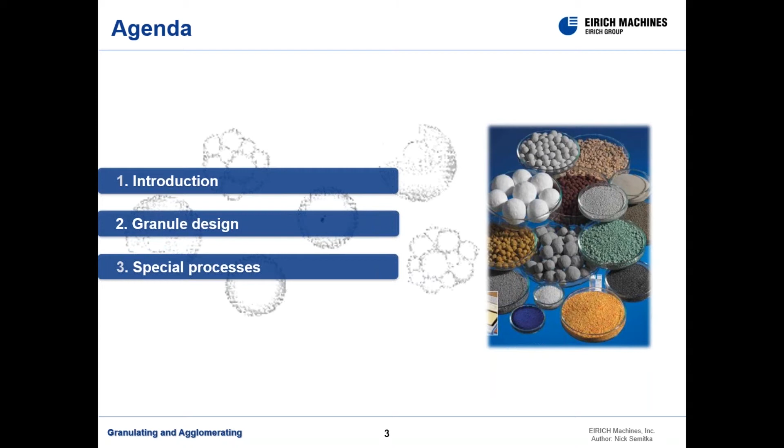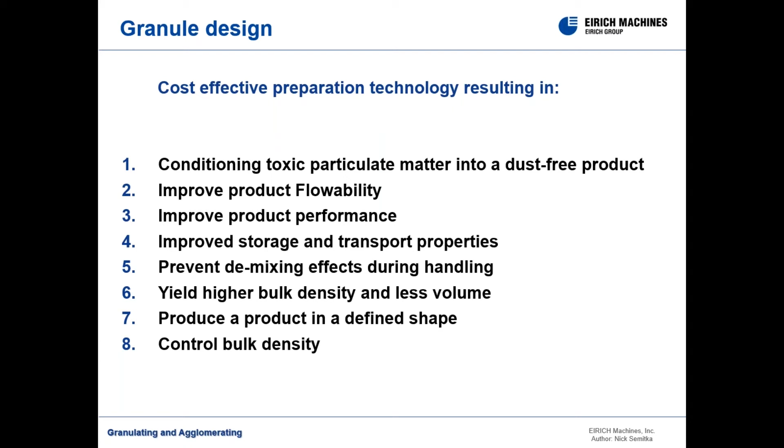Why do we want to granulate and what are the benefits? Some of the benefits: conditioning toxic particulate matter into a dust-free product, improve product flowability, improve product performance, improve storage and transport properties, prevent demixing effects during handling, yield higher bulk densities and less volume, produce a product in a defined shape, and control bulk densities.

You can find agglomerates or granules everywhere, not only in industrial applications but also at home, such as medicine tablets, washing powders, charcoal briquettes, fertilizer, cat litter, etc. All these products are distinctive in their own way, but they all follow the same physical laws of granulation.

Today we'll review formation methods, granule design, and special granulating processes.

Press agglomeration is the process of forming shapes using external forces. Some common processes include briquetting, which is a compaction technique where the feed material is pushed into the nip of two counter-rotating wheels. High pressure is applied and the rotating wheels compress the feed between the pockets to form shapes.

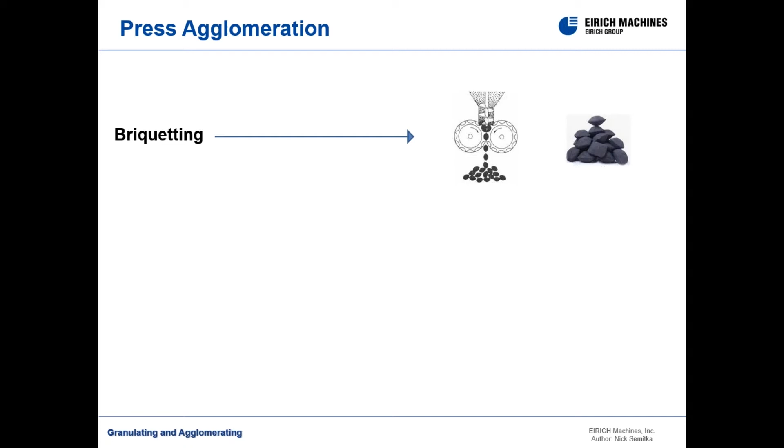Tablet or hydraulic pressing is a mechanical device that compresses powder into tablets. To form a tablet, the feed material is metered into a cavity where force is applied to fuse the material together.

Extrusion: it's important to note that while the terms are often used interchangeably, pelleting is distinctively different from pelletizing. Pelleting typically refers to the extrusion process where cylindrical pellets are formed by forcing material through a die and cut into pieces of a specific length.

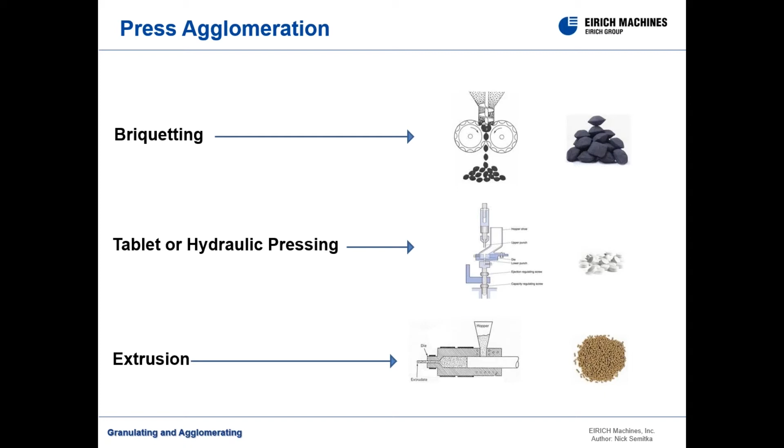Granules can be produced by various mechanical granulating processes. This could be spray dry agglomeration, drum granulation, pan granulation, and mixed granulation.

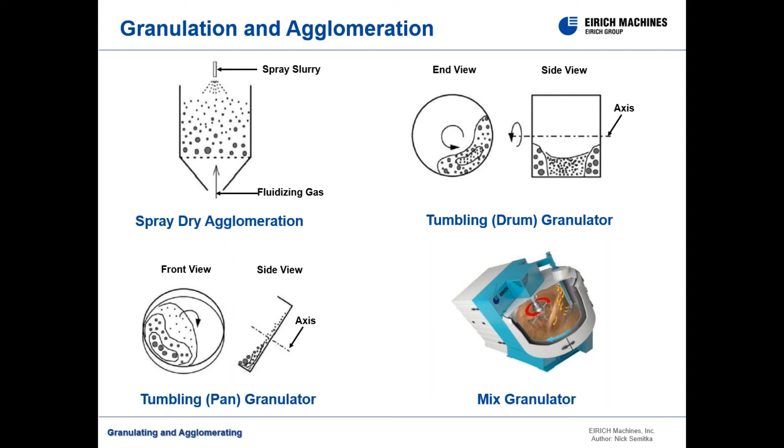Spray dry agglomeration, also referred to as wet agglomeration, involves the atomization of a liquid feed into very fine, small droplets with a hot drying gas, leading to flash drying of the droplets into solid particles.

The particles are then separated from the drying gas using a cyclone or filter bag as the final spray dried product. As you can see in the schematic here, atomized slurry is sprayed, heated gases flowing up, flash drying the product, and the finished granules fall to the bottom of the chamber.

As the water evaporates in the spray dried particles, they stick together to form a solid matrix, creating a granule with a hard shell. The granule size produced in spray dryers is usually less than 100 microns.

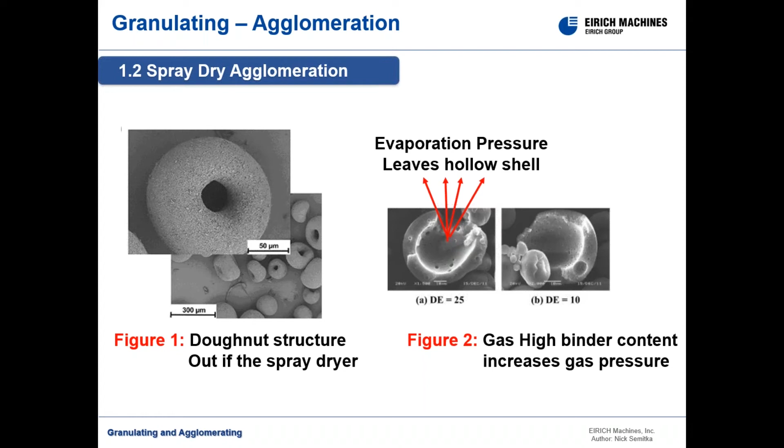Figure 2: if the binder level is too high, the evaporation pressure inside the granule increases until it explodes, producing a hollow shell. This may affect the preceding process, causing defects in the final product.

Build-up agglomeration: we will look at the three most common processes.

To form a granule, fine particles need to be moistened with binder, forming a liquid bridge, allowing the particles to stick together. The final product resembles a blackberry structure.

The blackberry structure is a cluster of fine granules combined to form a larger agglomerate. The best granulating results are found when the fineness of the starting powder is 150 mesh or smaller. Rule of thumb: the starting moisture for granulation should be approximately 13%.

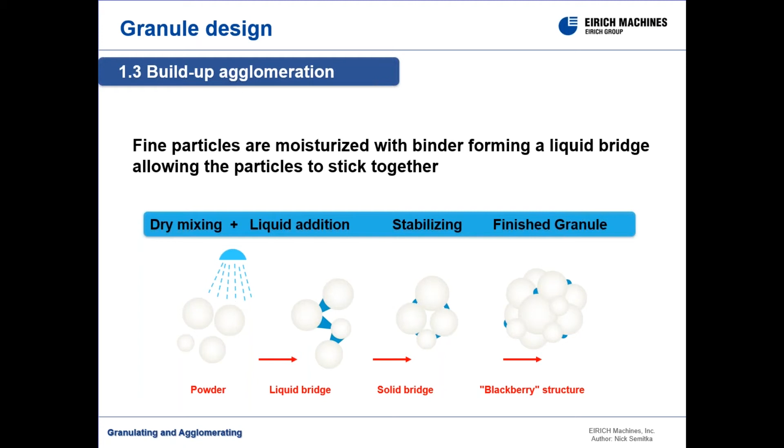Here is a close-up view of the granule blackberry structure.

Build-up agglomeration consists of dry mixing of powders, adding moisture, and thoroughly coating the dry particles. The particles become sticky, forming a capillary bond, and the granulation process begins. With additional processing, there is a separation of the smaller satellite particles, yielding the desired shape.

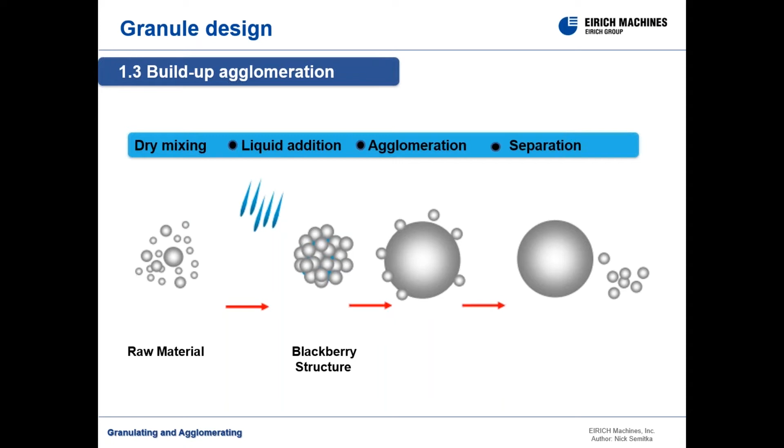A final rolling of the granules rounds off any sharp edges, yielding a nice sphere.

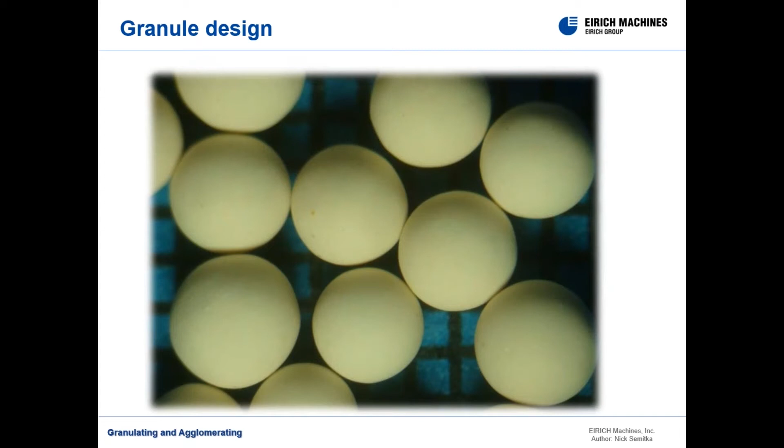Starting with a wide particle size distribution in a mix results in the larger particles attaching themselves to the surface of a formed granule. These granules eventually fall off, possibly affecting the chemistry of the granule. For the best results, all the starting powder should be close in particle size.

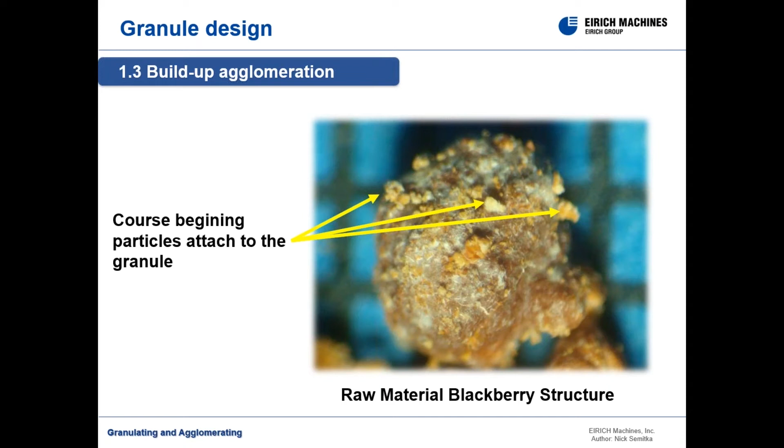Granulating involves tumbling fine materials against each other in the presence of a binding agent. The binder causes the fines to become tacky and stick together. As they continue to tumble, they pick up more and more fines, a phenomenon referred to as coalescence. To form granules in rotating drums or pans, the powders and binders commonly need to be preconditioned in a mixer.

Pelletizing drums are inclined cylindrical containers that rotate around their axis. The feed material is added at one end of the drum, and liquid is added via spray nozzles. As the drum rotates, friction between the material and drum wall transports the material upward, and at a certain point, the material rolls back. The tumbling action within the drum causes the material to pick up more fines and grow by coalescence. The speed of the drum is set so the rolling process can take place, resulting in the production of pellets.

Drums do not display size separation and thus deliver a wide pellet size distribution. The product leaving the drum is screened, removing the overs and fines, which will be crushed and recirculated back into the system. Recirculating quantities are many times larger than the original feed amount. Pelletizing drums always run in a continuous mode.

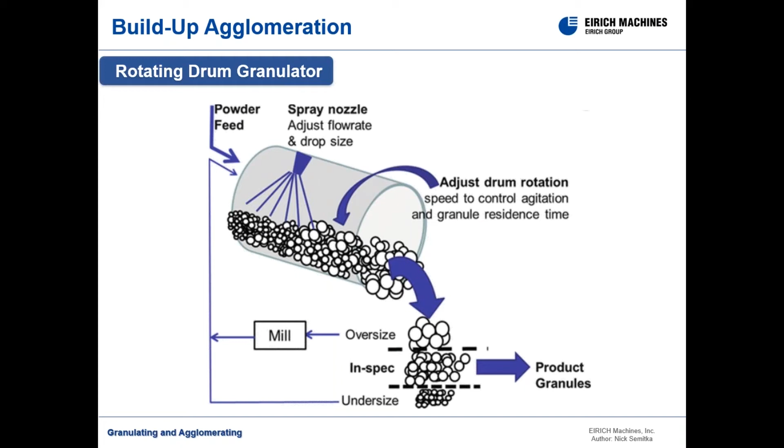Disc pelletizers are inclined containers with a cylindrical shape that rotates around its inclined axis. The fine material is continuously added and transported up the rotating disc until it falls back to the bottom due to the effects of gravity.

The kidney-shaped circulation is formed where the rolling action grows the pellets in conjunction with the addition of a liquid spray. By adjusting the inclination and rotational speed of the disc, it is possible to vary the pellet size within wide limits, ranging from 1 millimeter to 30 millimeter.

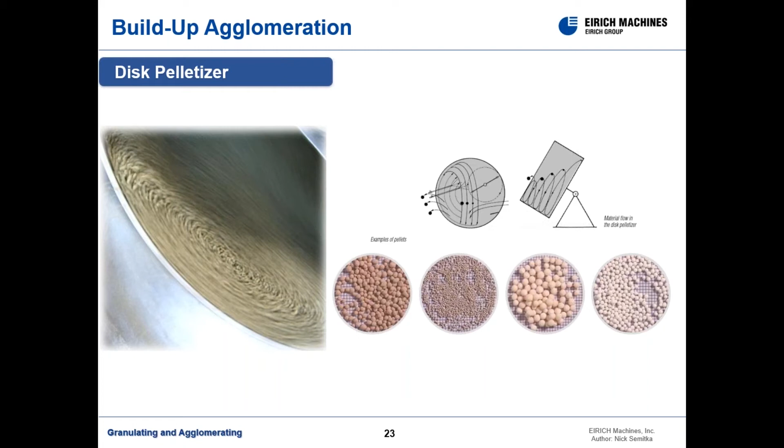The granulating principle in the disc pelletizer is similar to the rotating drum. The granulation process begins in the upper quadrant of the disc, shown in zone 1, where the pellet and nuclei are rotating and begin to form.

As the granules grow, they start migrating downwards towards zone 2. In zone 3, you start to notice a defined circulation of the granules until they reach a size and tumble off the edge of the disc, as shown in zone 4. The circulation area, zone 3, is called the granulation kidney due to its noticeable shape.

Within this area, the rotational speed of the disc and additional moisture can be adjusted to achieve the target granule size. Stabilizing the process may require multiple steps, such as adjusting the feed rate into the disc, adjusting the disc angle, changing the location of material feed input, and adjusting the rotational speed of the disc.

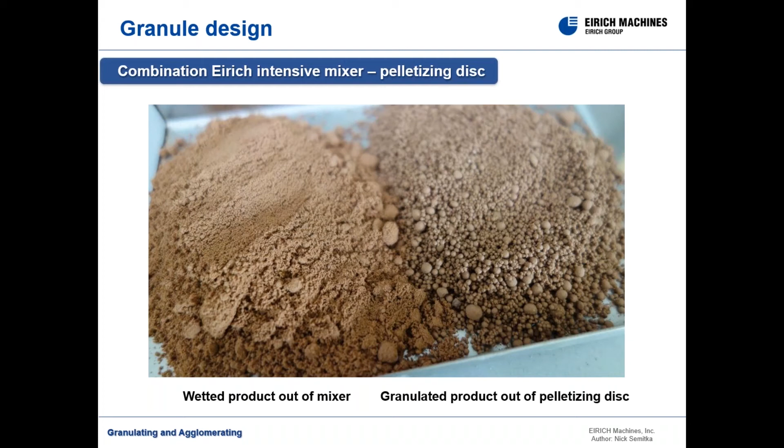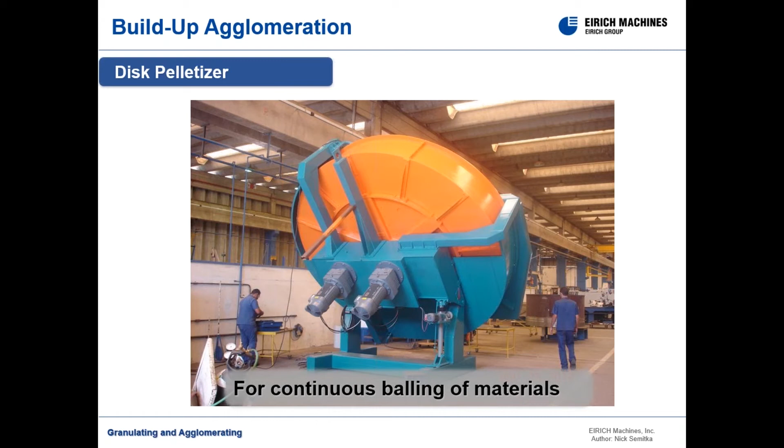Disc pelletizers can get quite large, with disc diameters up to 25 foot in diameter. Disc pelletizers alone are not recognized for high efficiency. Therefore, in some cases, multiple units are required to achieve the required throughput rates.

To ensure the product coming off the disc remains consistent and uniform, the pelletizing process requires monitoring at regular intervals. This monitoring is necessary because even minor fluctuations in the amounts of solids or liquids can alter the process.

Effective applications for disc pelletizers include pellet or granule sizes up to 30 millimeters in diameter, having fragile products with little strength, products with a high amount of coarse particles, particles with a wide size distribution, and improving sphericity, making rounder granules and shapes.

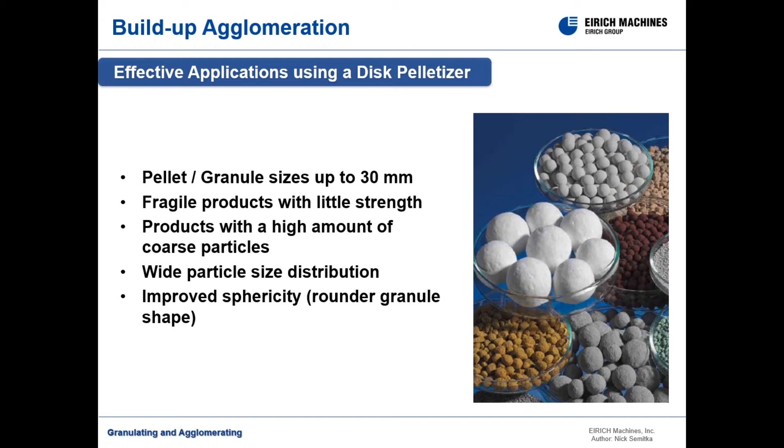The granulating mixer has a rotating mixing pan and an eccentrically mounted mixing tool, also referred to as the rotor. By intense mixing, the particles are bound closely together with the addition of a binder. Once the nuclei of the granules have developed, the rotor speed is reduced. This is where the actual buildup agglomeration process begins to take place. The particle distribution can be controlled in a defined manner.

Depending on the type of material being processed, granules up to 6 millimeters in diameter can be produced. This process can be fully automatic and run without supervision. Granulating in the rotating pan mixer can be a batch or a continuous process.

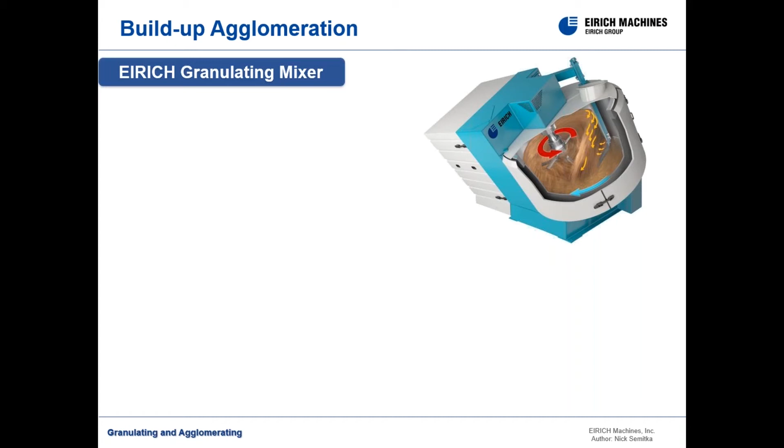With the Eirich mixer granulator, you can achieve higher strength granules compared to preparing in a drum or disc. The Eirich mixer granulator has three unique operating principles, including a rotating tool, or the rotor, a rotating mixing pan, and a stationary multi-purpose tool, which also acts as a wall and bottom scraper, keeping the insides of the mixer clean.

The rotating mixing pan is used to deliver the product into the high-speed agitator, or rotor, where energy is input into the product.

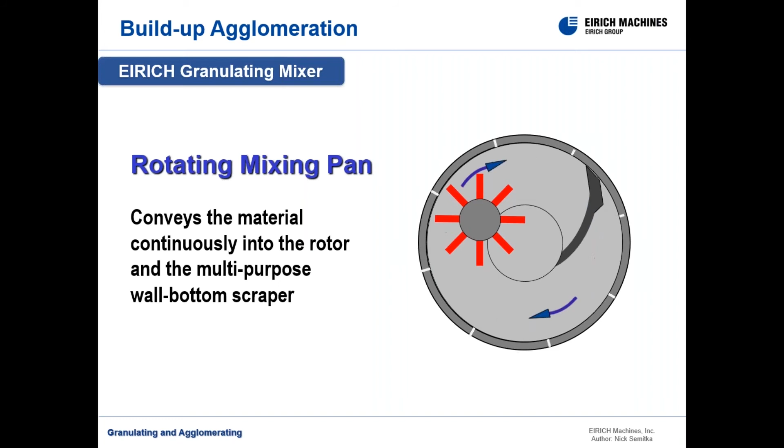The rotating tool, or agitator, can rotate in a clockwise or counterclockwise direction and also can vary its speed, as required depending on the energy you want to input into the product.

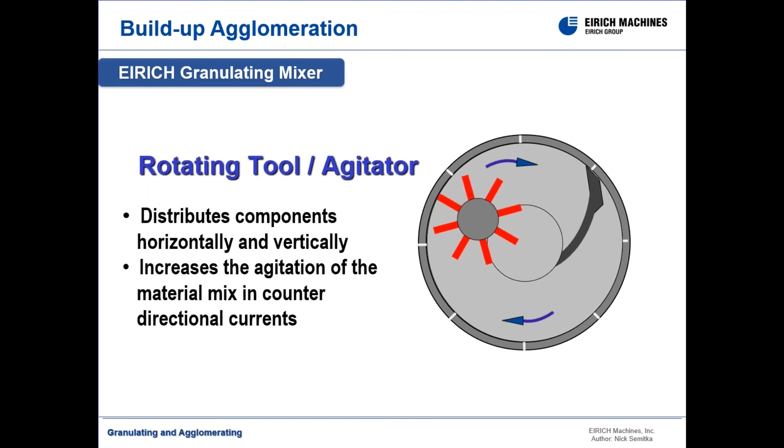The stationary multi-purpose tool produces a vertical component in the material current, cleans the pan wall and floor, and accelerates the discharge of the product inside the mixer.

So as the product comes around and passes through the rotor, the scraper pulls the material off the sidewall and delivers it right back into the agitator. So after one complete revolution of this mixing pan, you have a well-mixed product at that point.

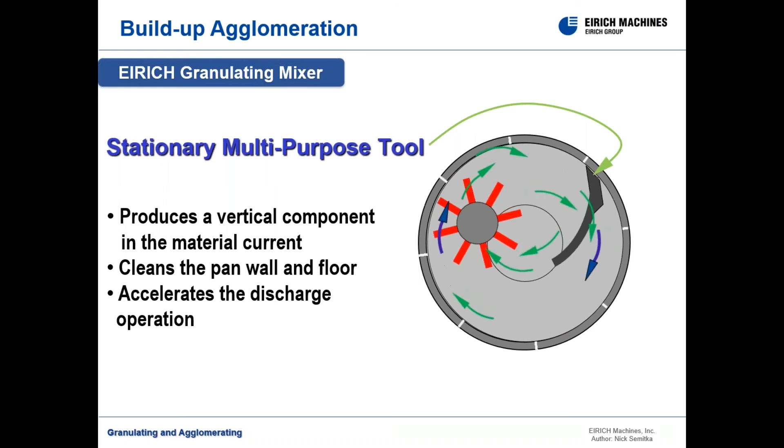Another unique feature of the Eirich mixer granulator is its inclined mixing pan, typically set at 20 or 30 degrees. As the pan rotates, the material is pulled off the bottom and we let gravity work for us. The product gets to the 11, 12 o'clock position and rolls over. So everything within that mixing container becomes active, providing a vertical and horizontal mixing action.

Today's Eirich mixer granulator was designed with the disc pelletizer in mind. Eirich already had a rotating pan mixer dating back to the early 1900s, but in the early 70s, the R-type mixer with an inclined mixing pan was introduced, mimicking the disc pelletizer.

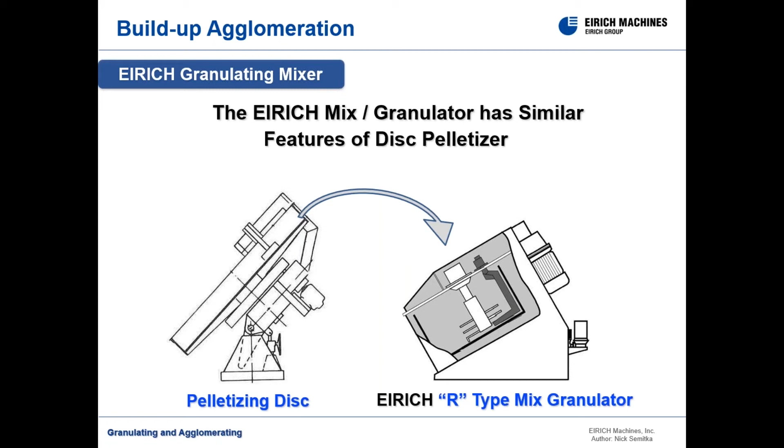Mixing and granulating in a single machine simplifies the production process by eliminating additional processing equipment. The Eirich intensive mix granulator is extremely efficient at dry mixing, granulating, coating, and preparing plastic bodies for extrusion.

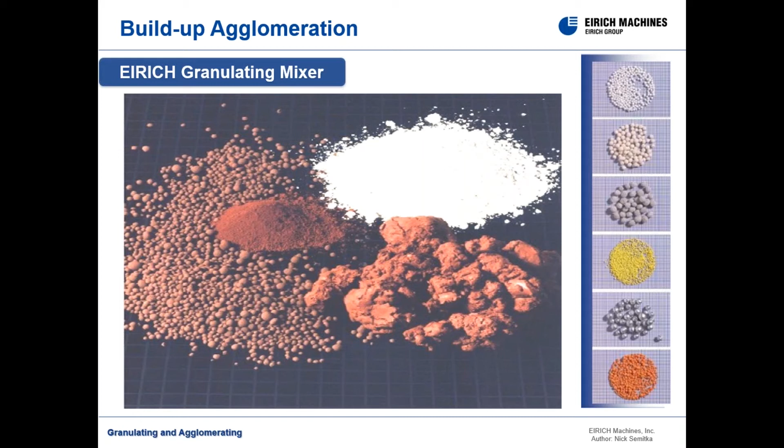The Eirich mixer granulator is excellent at granulating, but also we can take filter cake or sludges, and by mixing in dry powders can create granules.

We already touched on how a granule is formed, but when additional processing steps such as coating or rounding off the particles are required, sequential processing steps such as re-wetting and adding dry powders into the mix to shape the granules can be employed to achieve the desired results.

Starting with the blackberry structure formed by the moistening, the powdering provides nice round surfaces on the finished granules.

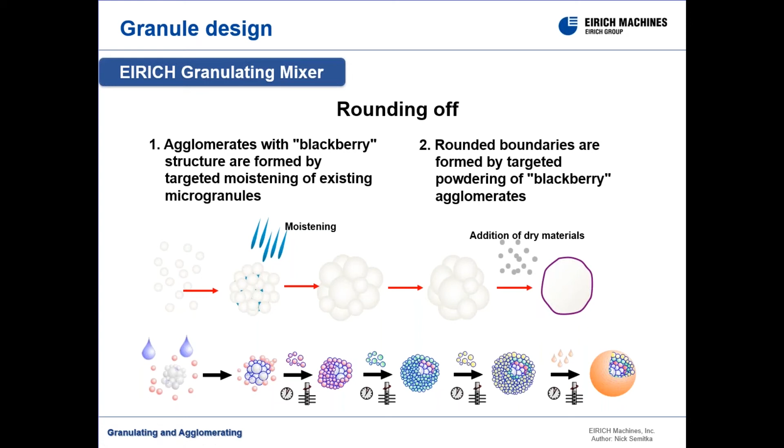To form a granule in the Eirich mixer, the following steps are required: dry mixing, moistening. After moistening, the particles get sticky and begin forming a bond. The granule is densified with the impact energy of the rotor, and the granules begin to grow, shaping the granule to a desired shape.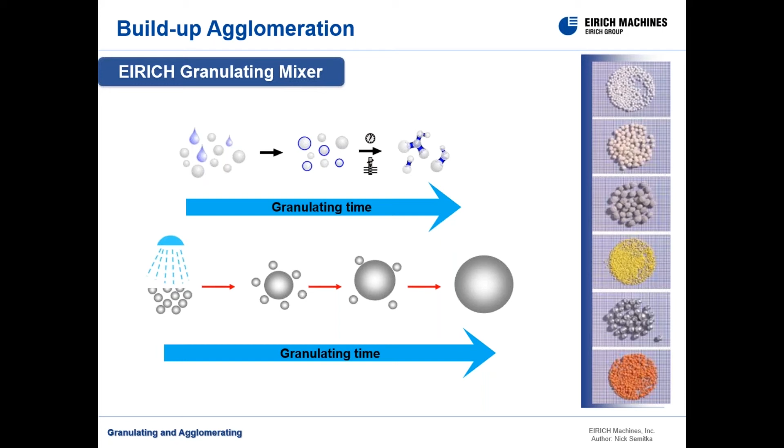The Eirich mixers offer the versatility of creating microgranules up to a granule size of 6 millimeters in diameter.

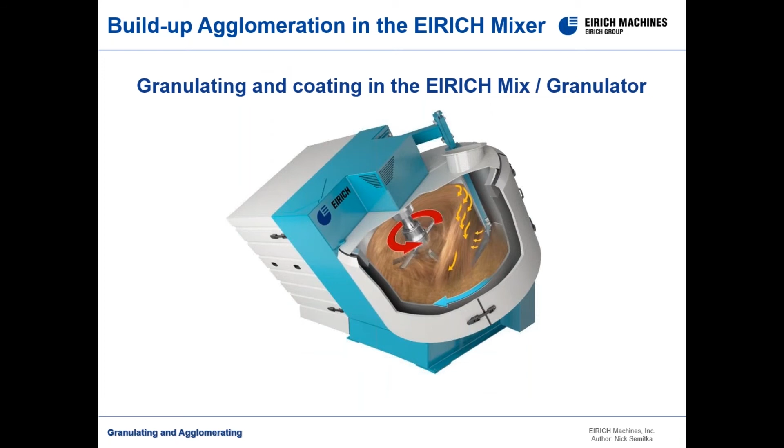Here is a video demonstration of the granulation and coating process in the Eirich mixer.

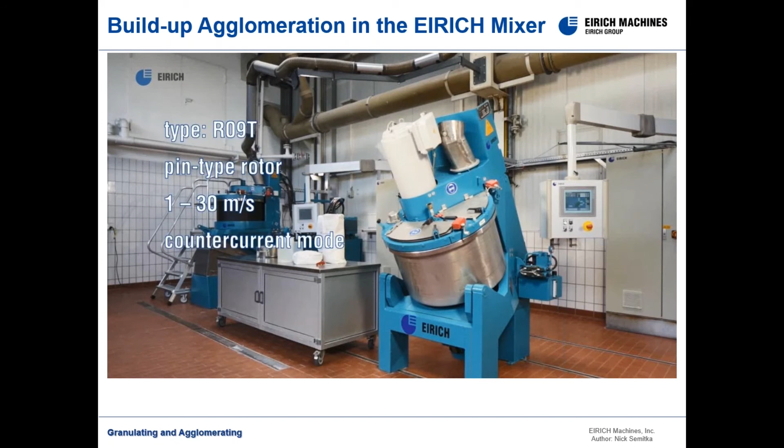The mixer that we're showing here is a 150 liter capacity machine. We're going to be processing some alumina powders and granulating with water.

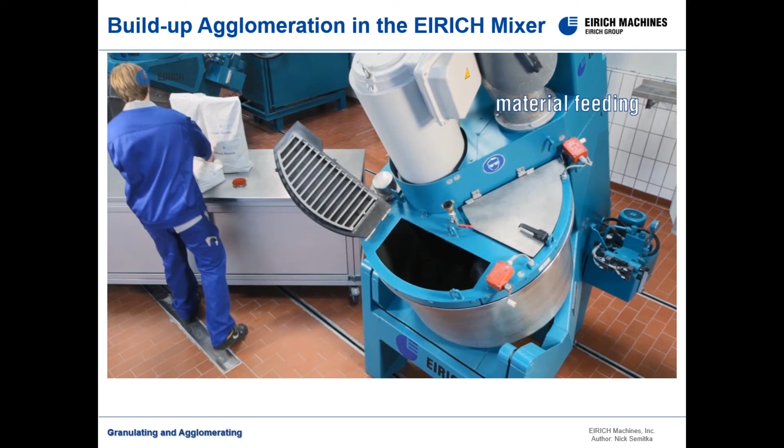We're going to put all the raw materials into the mixer at one time and go through a dry mixing phase.

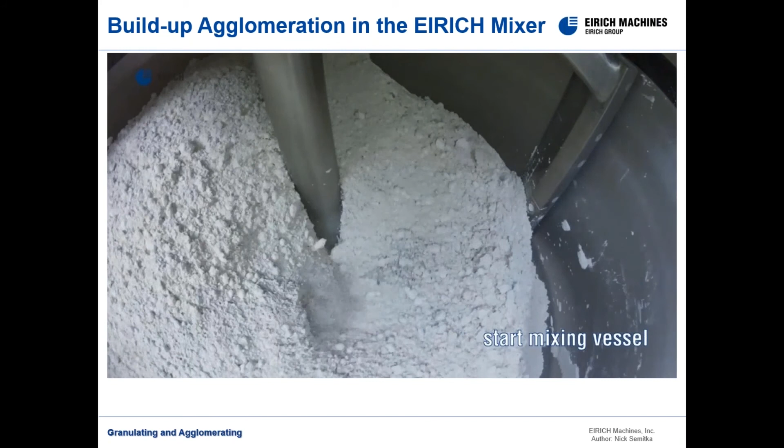Here we're adding an iron oxide just to show how quickly the material gets distributed into the mass of the material, and adding water as the binding agent.

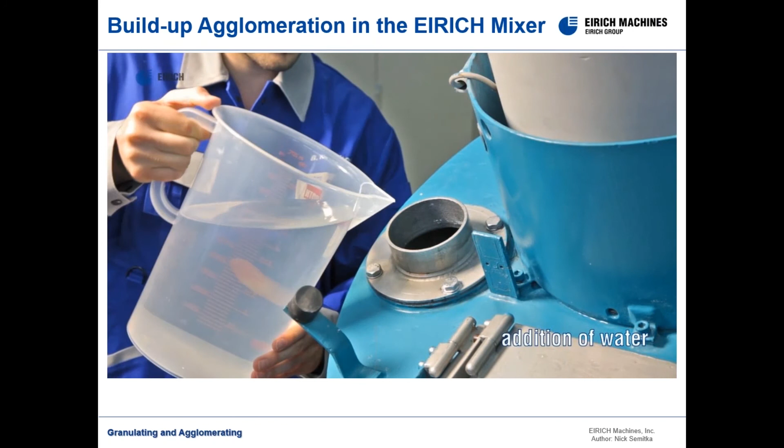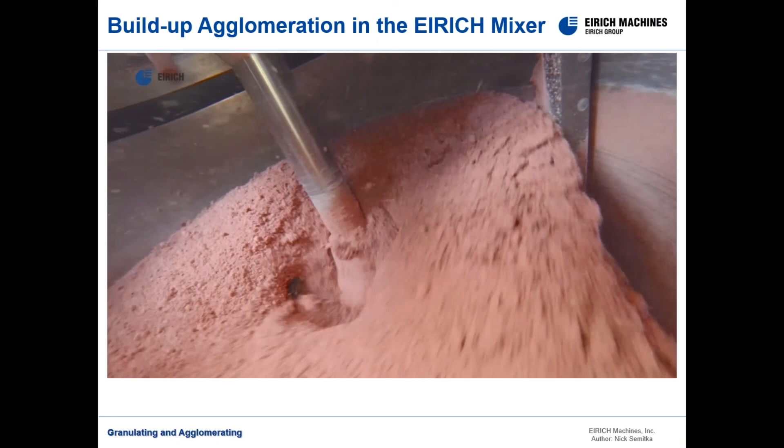The intensity of the tool densifies the product, coating all the granules, and you start seeing the powders transforming into granules. After a short mixing time, you have 1 millimeter granules.

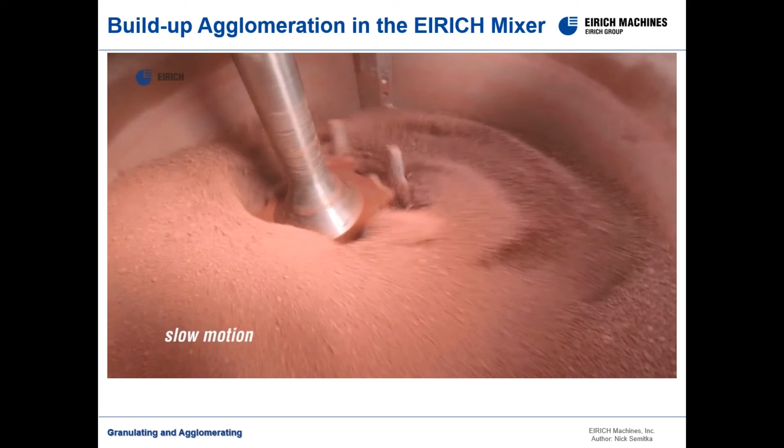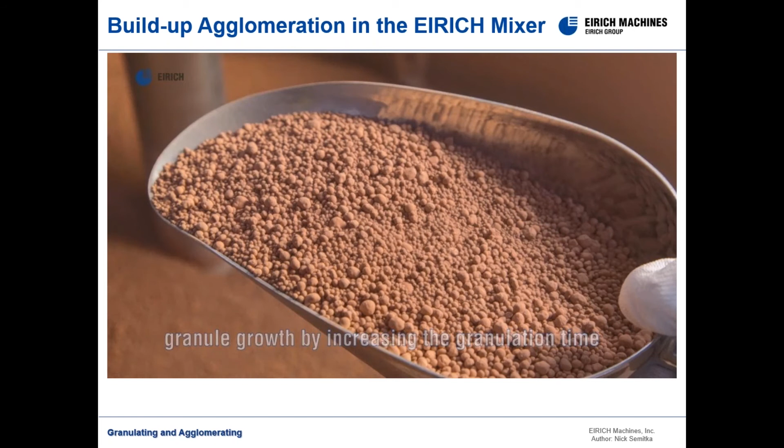By the addition of water or moisture, we can grow the granules larger, and with additional processing or mixing time, the granules get larger also. So here you'll see the three phases over time, from small granules, and with time the granule size increases.

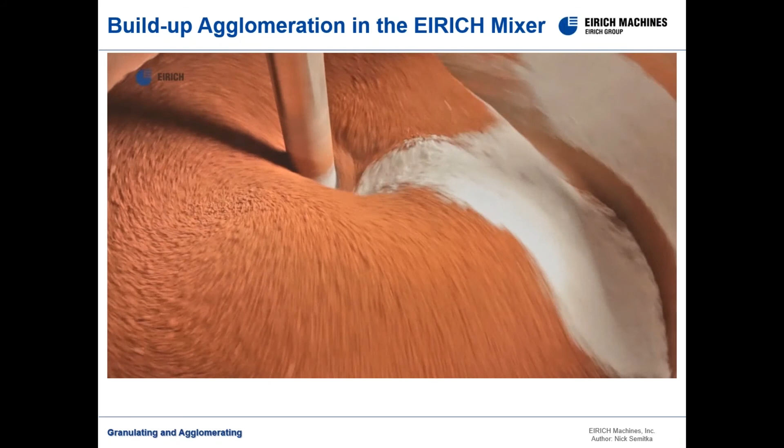So we can also coat by adding a dry powder. Now that we've created the granules, we add a dry powder to coat the particles, and this can be useful for removing surface tension or moisture off the granule to make a nice free flowable product after coming out of the mixer.

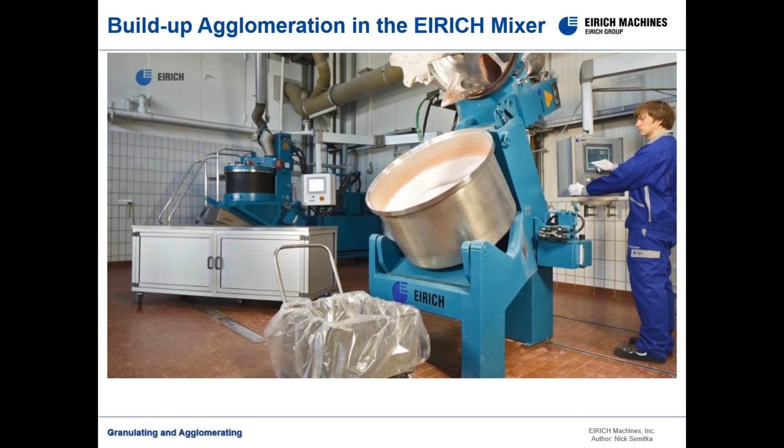Now, the coating can be a dry powder as shown, or there can be liquid coatings applied also.

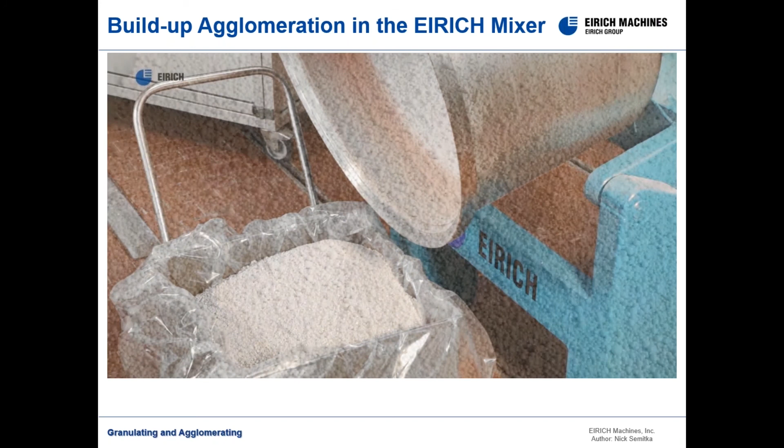And you'll notice that the granules were coated without breaking up the original granules. So the mixer is intense enough, puts enough energy into the product to densify it, yet keeps the integrity of the granule.

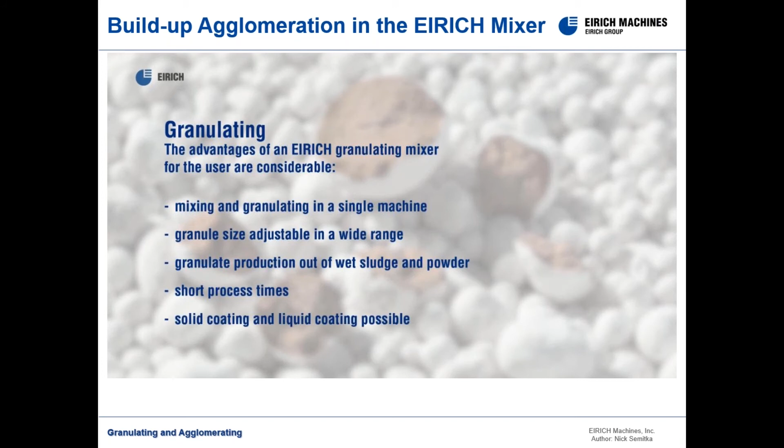If the rotor speed is too slow or moisture too high, the larger particles grow quicker. A huge advantage of the Eirich mixer is its ability to control the particle size by adjusting the rotor speed. Also, if the particle gets too large, the rotor speed can be increased and the granules resized.

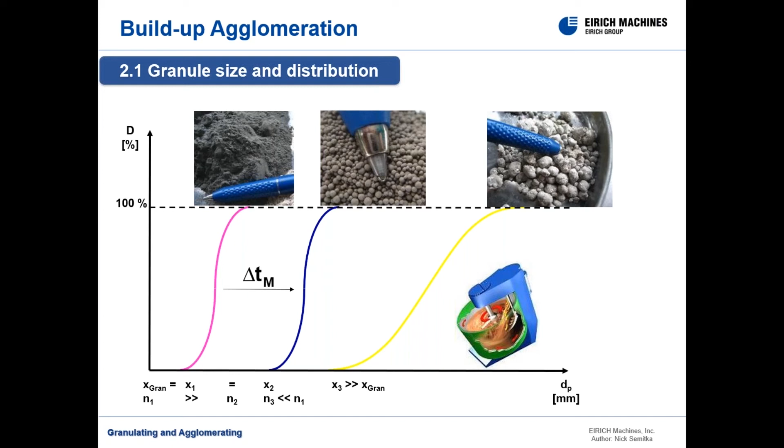Longer granulating times will lead to a coarser product. Like a snowball rolling down a hill, the longer you roll the granule, the larger it becomes. The additional rolling picks up any loose fines and attaches itself to the larger granules.

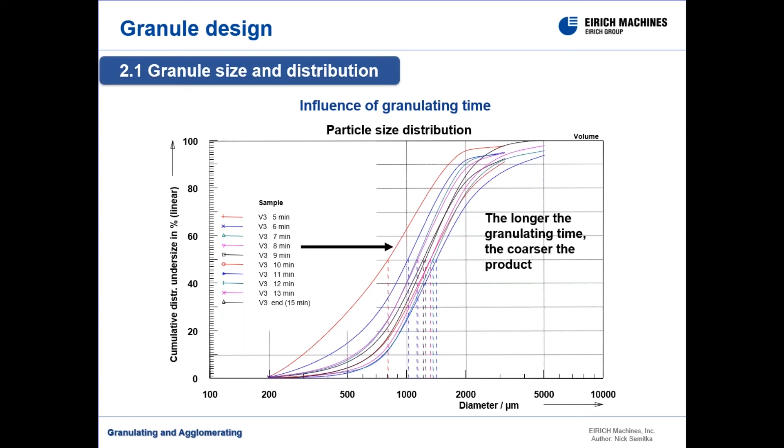Here is an example of granulating material to produce ceramic proppants. The higher tool speeds enable the particle size distribution curve to stay very tight and narrow.

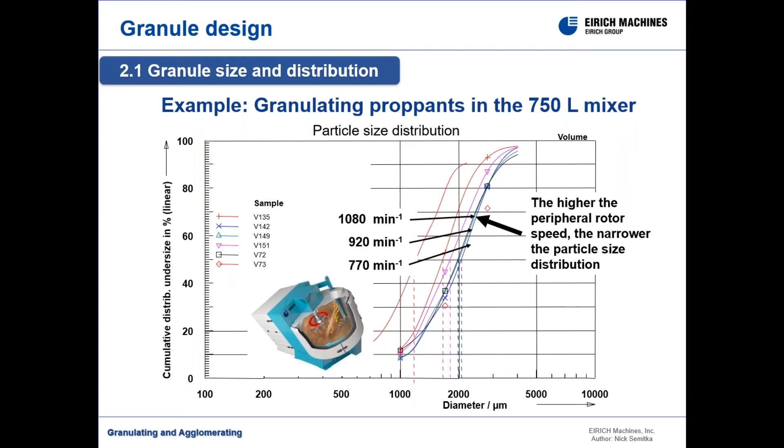The granulation process can also be carried out in steps. Some applications require higher initial speeds to disperse liquids and then slowed to grow the granules and round off, improving sphericity. The Eirich rotating pan mixer allows you this processing flexibility.

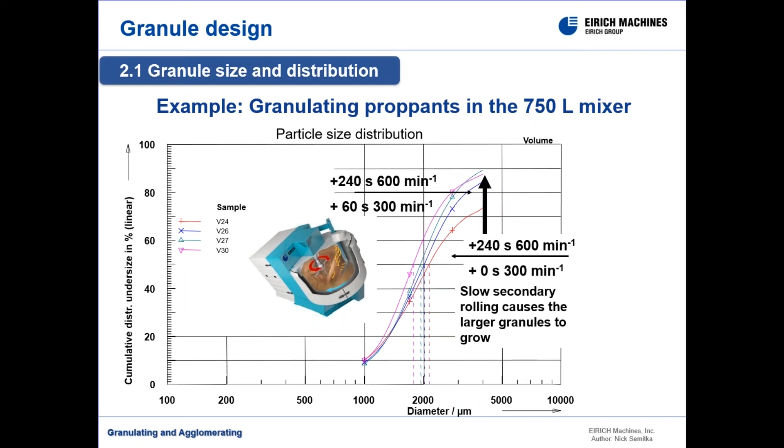You will never achieve 100% yields within a specific distribution. The oversized material needs to be screened, dried, and crushed before being put back into the system. Using an Eirich optimizer reduces the amount of product that has to be recirculated. We found that by implementing the optimizer, we are able to increase yields within a target range up to 90%

of usable product. The operating principle of the Eirich optimizer is two counter current rotating discs running at high speeds with an adjustable gap between the two discs. The gap defines the maximum limit of particles leaving the machine.

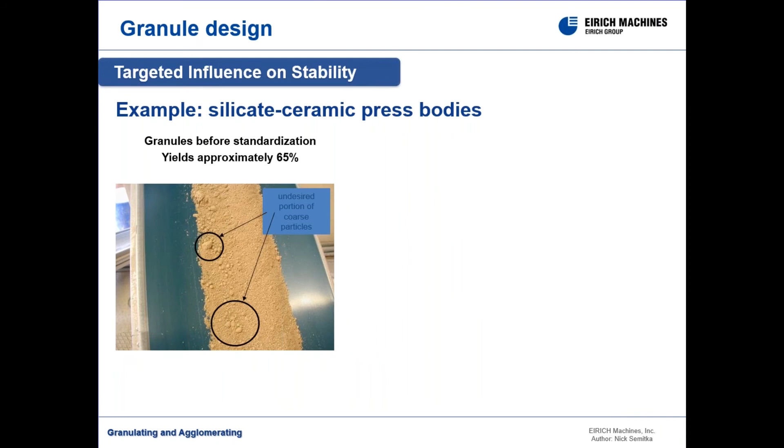Here is an example before and after stabilizing a granulated material in the Eirich optimizer. Product material coming out of the mixer, we were seeing yields of 65%. Processing the materials through the optimizer, we increased the yields up to 90%. Now you see a nice product without any large agglomerates and uniform properties.

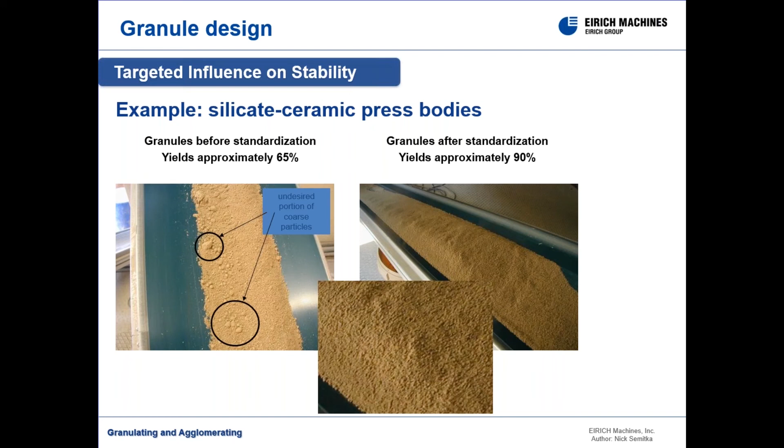The previous slides explained the versatility and processing advantages of the Eirich mixer granulator. Here is a summary: homogeneous mixing of numerous ingredients in batch operation, perfect wetting with liquids and binders by fast running rotor tool, turning powders into granules, turning pastes and filter cakes into granules, coating granules with solids or liquids.

Tightening the size distribution, producing smaller granules from 0.5 millimeter to 6 millimeter, with high yield possibilities, working in conjunction with pelletizing discs or drums.

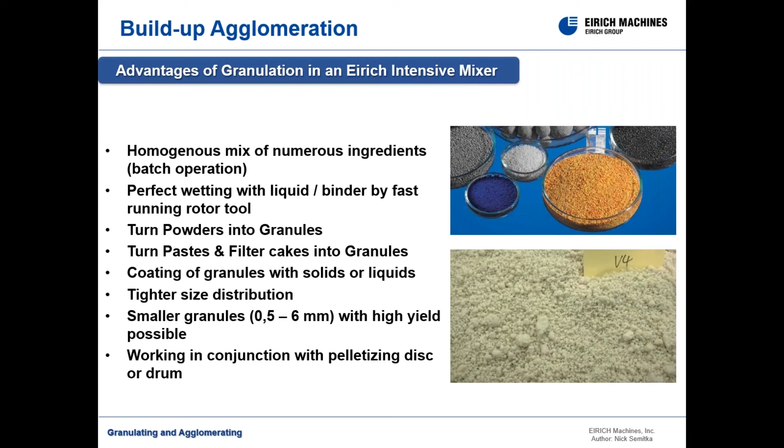In a typical granulating system, we would take the raw material, feed to an Eirich mixer granulator, granulate, dry, and screen the final product. So here you'll see all the raw materials being batched into the rotating pan mixer. Granules are formed, leaving the mixer, going through the drying and screening process.

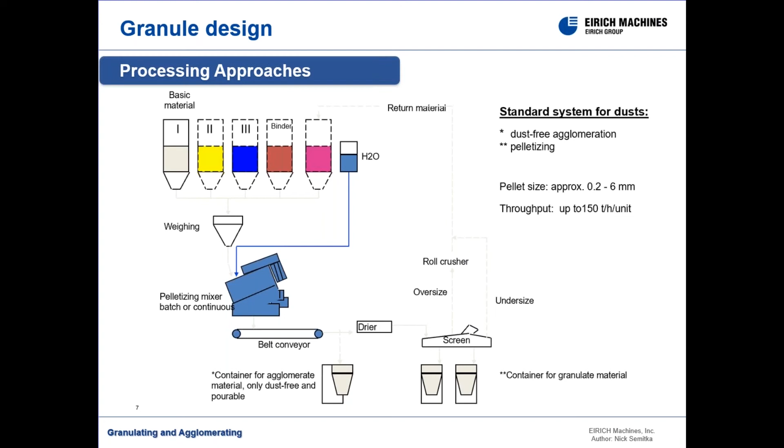The Eirich mixer can also be used to precondition the raw feed and provide a continuous feed to a pelletizing drum. So here we're taking the raw materials, preconditioning, adding the moisture, combining all the dries, and feeding to a pelletizing drum.

Eirich also offers a continuous mixer for preconditioning feed to downstream equipment. There can be a range of reasons for choosing combined methods. If the application presents special demands in terms of grain roundness, then the granules can be manufactured in combination with a mixing disc pelletizer. To accomplish this, the granules are produced in the mixer and then used as pellet feed.

The pre-granulated pellet already has the correct moisture and instantly starts rolling into the required shape in the disc pelletizer, thereby significantly accelerating the pellet formation. The combination of mixer and disc pelletizer is also recommended for sensitive materials in which an equilibrium is established in the mixer and ready for additional formation.

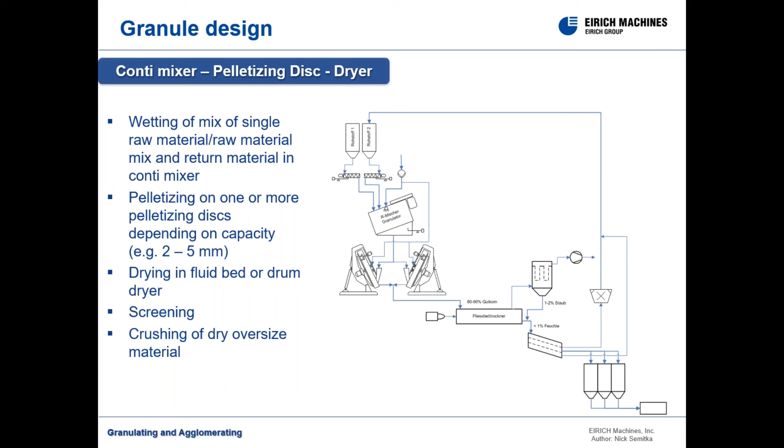Afterwards, screening, crushing of dry oversized material, and returning back into the system. So in the granulation process, there's always a recirculation loop where the overs and fines are recirculated back into the system.

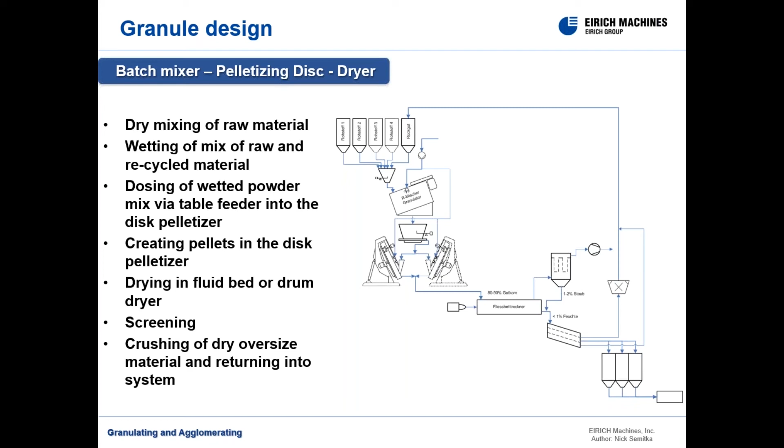When preparing granules in a batch process, an intermediate device such as an Eirich table feeder can be implemented, providing a continuous feed to downstream equipment. So in the batch process, that gives us the best control of our process. We would prepare granules by batch and discharge into the hopper of a table feeder. This device would take the materials and feed on a continuous basis to downstream equipment.

The Eirich table feeder consists of a transition hopper, rotating table, and adjustable discharge plow. The flat rotating table has vertical pins that gently funnel material from the hopper cone to the discharge plow.

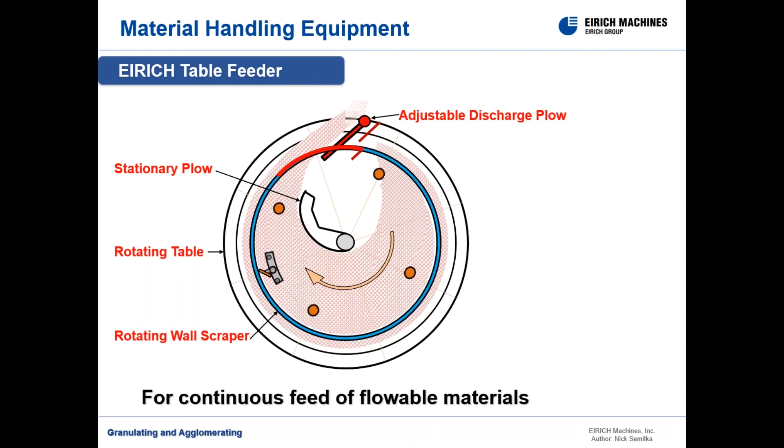As the table rotates, the vertical pins agitate the material and keep it flowing evenly into the discharge plow. The discharge rate is adjustable by changing the angle of the discharge plow or the table rotational speed. The internal wall scraper in the table feeder prevents material buildup on the sidewalls, ensuring consistent flow.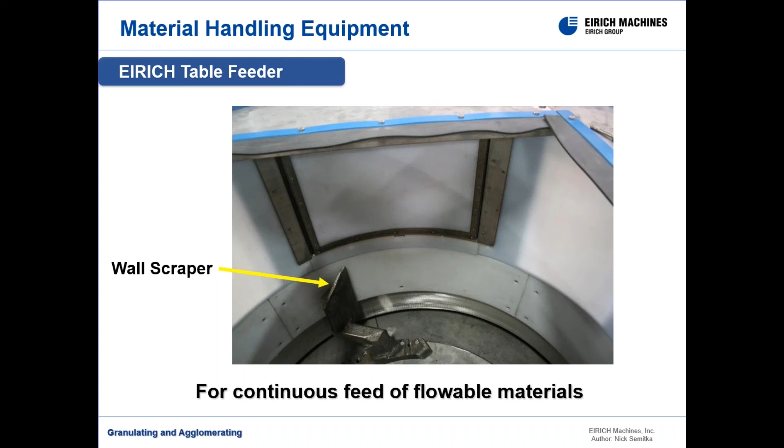Moisture. The hollow spaces between the granules should be approximately 90 to 95%, resulting in the strongest pellets. Coating each grain by driving the moisture to the surface of the granule requires energy. The strongest pellets are formed when capillary bonds are achieved, increasing the surface tension of the granules.

Moisture gets trapped in the hollow pores between the small granules, and by introducing energy, densifies the material, filling the hollow pores between the granules and driving the moisture to the surface. And that's when the granulation process starts.

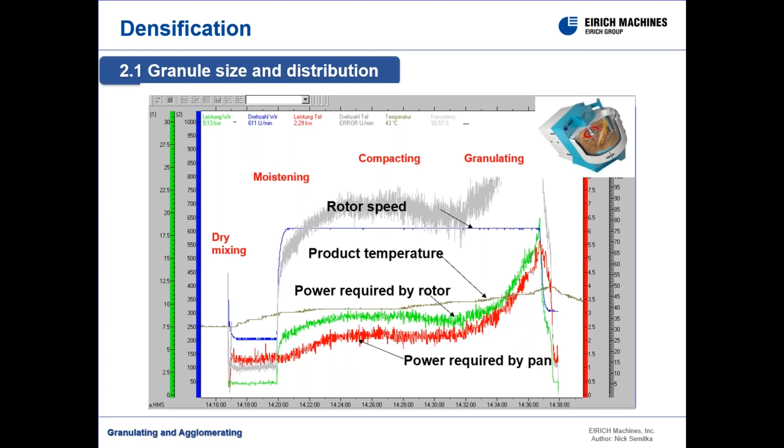Stabilizing. Product stability is the state of being firmly fixed or not likely to move or change. The binder used in the process has considerable influence on the formation and stability of the final product. Physical binder effects influence high green strengths, high stabilities after drying, high porosity, low or no porosity, favorable dispersion.

Chemical effects could include product remaining in the product as a pressing agent, stabilization prior to drying or sintering, residue-free burnout, and reduction of off gases during drying.

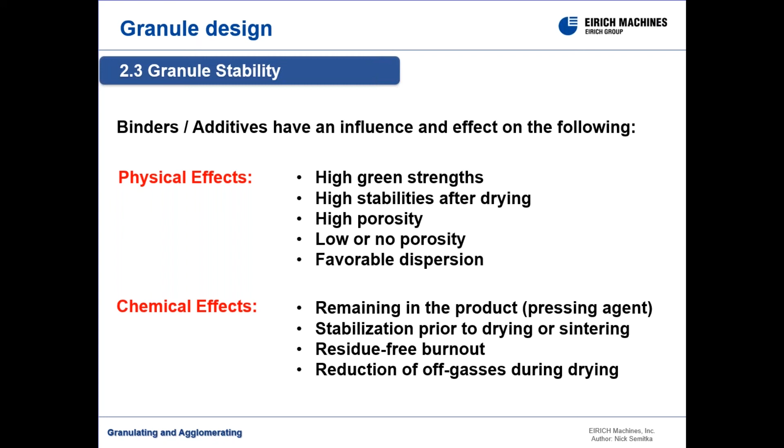In most cases, some type of binder has to be used in the granulation process. The binder can be something as simple as water, or as an example, some of the organic and inorganic binders as shown on this slide. Inorganic binders can include bentonite, cement, silicates, plasters, clays. Organic binders include carboxymethylcellulose (CMC), molasses, pitch or tar resin, starch, polyvinyl alcohol, and a number of other binders that would be compatible with your process.

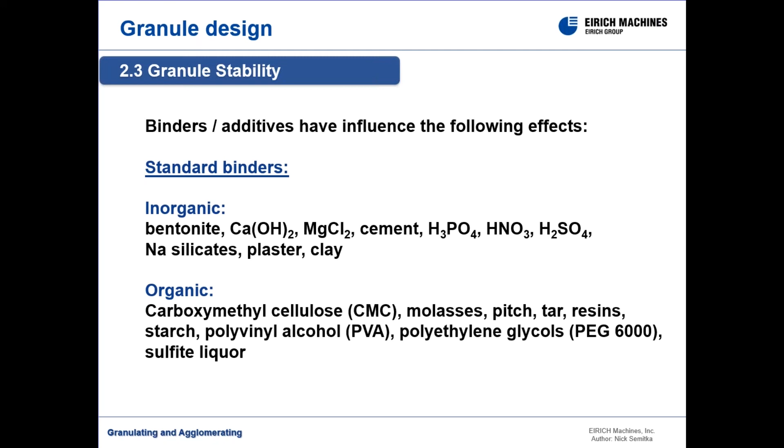The stability of a granule is achieved when the product is easily wettable and can absorb moisture. Selection of an appropriate binder and particle distribution matters. Particles having the same shape, such as a perfect sphere or cube, are difficult to agglomerate. Particles with a coarse surface granulate more effectively.

In some cases, the created granules require additional processing. For instance, ceramic proppants or iron pellets are sintered. Sintering occurs when the moisture is removed from the mass by applying high temperatures, usually in a rotary kiln. The powdered materials coalesce into a solid mass. The high temperatures melt the grains together. This melting happens in several steps until a strong matrix is produced.

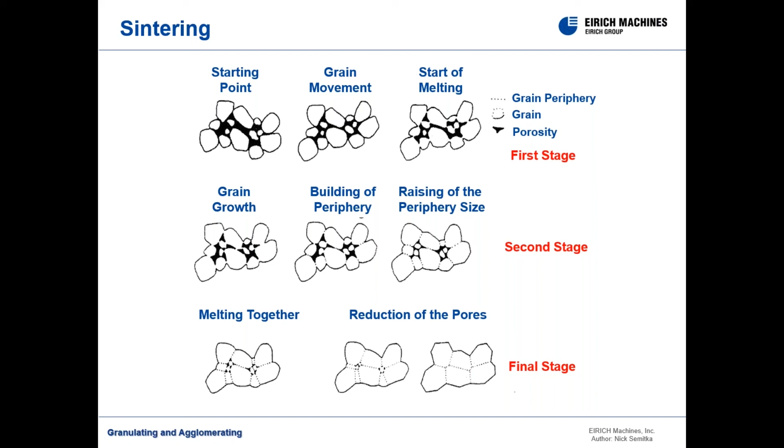Thermal drying. Drying the surface of the granule with heat or coating the granule with dry dust reduces the surface tension of the granule, making it less sticky and easy to handle.

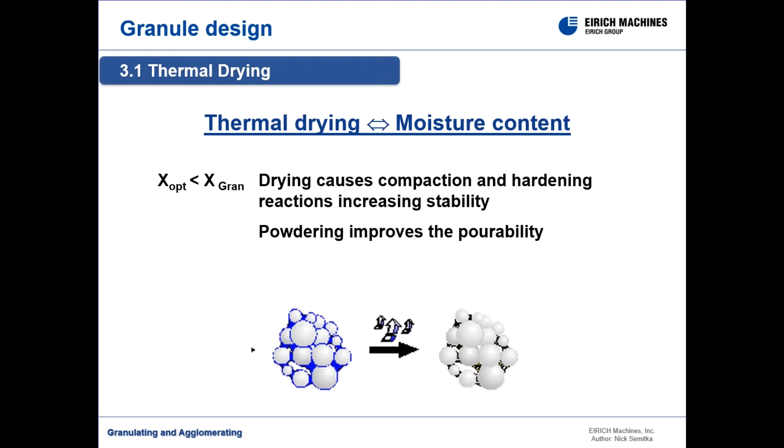Improving the flowability of the finished granule could be achieved by thermally removing the surface moisture of the granule or dusting powder with dry dust. And this will all be done as the granules are being processed in the rotating pan mixer.

There are many ways to dry. Convection drying can be used by blowing heated air into the mixer after the granule is created, hardening or curing the surface of the granule.

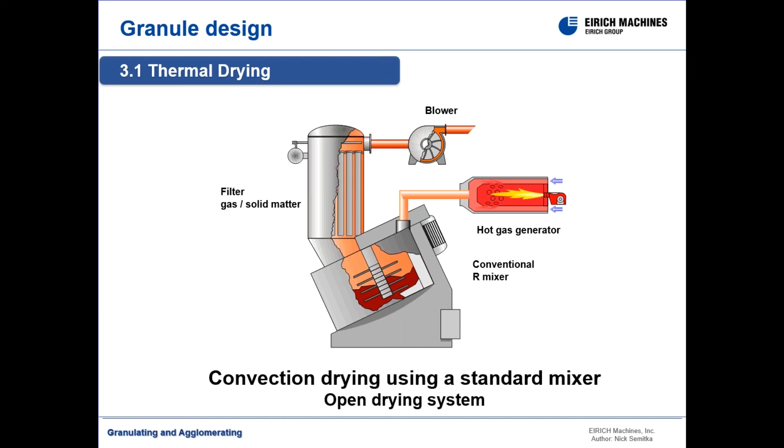When granulating products with solvents, we would use a vacuum drying system, heating the product, possibly with steam, removing the moisture by condensing the liquids, and initiating the product granulation. So this would be a complete closed loop system.

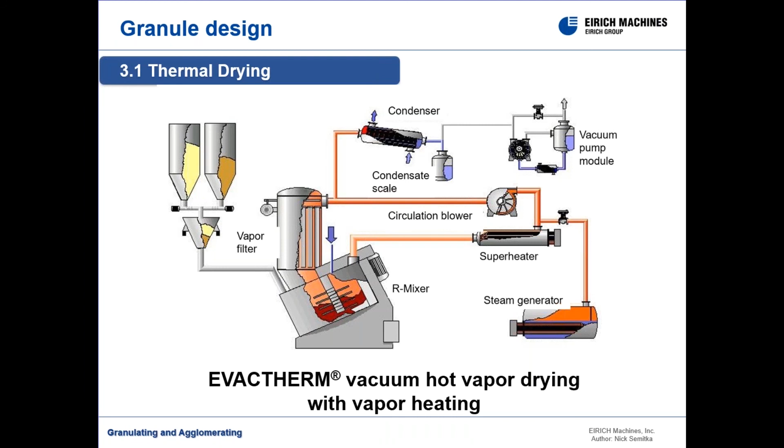The onion skin structure with thermal drying is achieved by creating the granule and adding additional powder or moisture, forming a shell around the nuclei. The process can be repeated to create the desired structure. Common applications, for example, are time-released products similar to a fertilizer.

The onion skin structure can also be accomplished without thermal drying by moistening the surface of the granule and coating with dry powder to create the desired product. This process can be repeated to create the desired structure and size.

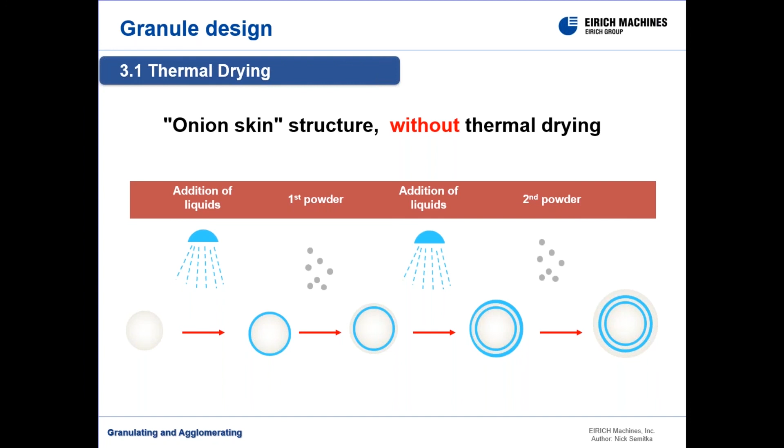Instantizing. Instantizing is a technique that improves the dispersibility and solubility of powders introduced to a liquid. The instantizing process uses steam to produce granules that are easily dissolved in liquid.

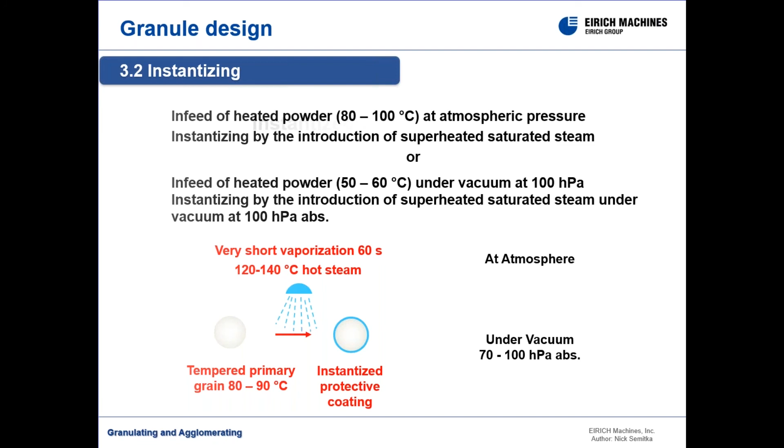Melt agglomeration is the process of melting a binder, for instance a wax, outside of the mixer, heating the dry powder and adding the liquid wax onto the powder, creating a granule.